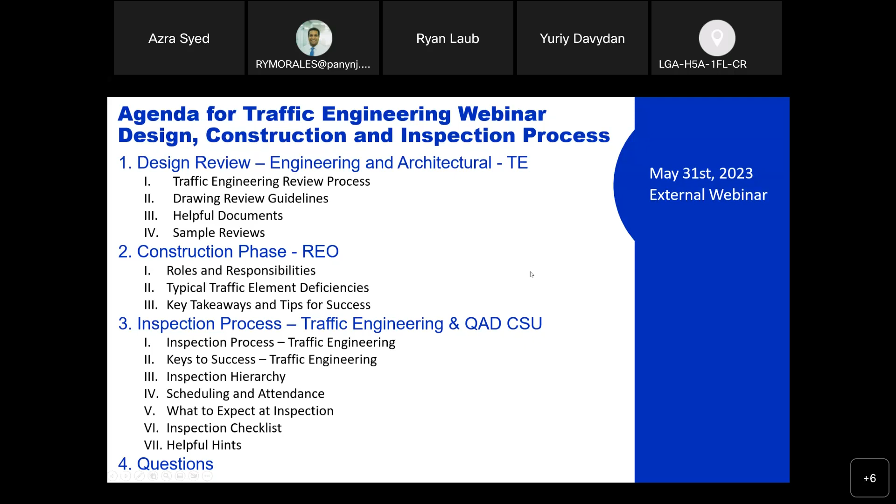Great, thank you. Hi, everyone. I'm Allison Kroenert. I'm the traffic engineer in the Planning and Project Delivery Group at the Port Authority, which falls under traffic engineering. My roles and responsibilities really span across all the Port Authority's different facilities, including aviation, tunnels, bridges, terminals, ports, everything that the Port Authority has to offer. These responsibilities include providing traffic engineering services, which also includes coordinating with TCAP and reviewing the TAAs that you may be submitting.

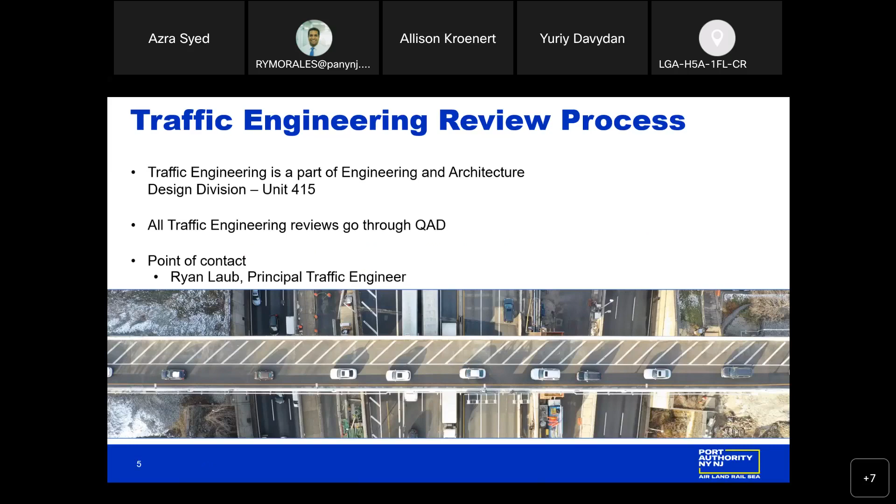Next slide. So I don't do all the reviews by myself. We have a whole team of traffic engineers who are working on these reviews, and we're all part of the Engineering and Architecture Design Division. Now, QAD, our Quality Assurance Division, is actually who ends up coordinating the review. They'll send it over to Ryan Laub, the principal of the Traffic Engineering, Planning, and Project Delivery Group, and then we make sure that it gets reviewed on time with valuable feedback.

Next slide. So you may be wondering, when does traffic engineering have to be involved in these reviews? Now, this list here isn't exhaustive, but it does give a good idea of when to call someone in from traffic for concurrence. So this is any time that a project might add volumes to our roadways or facilities, and this would then result in a scoping meeting required for traffic studies.

Anything that adds or modifies an access point, if you're adding a building that requires a new driveway, that's definitely something that we have to review because we have certain standards that we need to make sure we're adhering to. Anything that impacts our roadways, so this could be traffic signals, permanent traffic barriers, any additional signing or pavement marking on our roadways.

Anytime that you have a project that might impact pedestrian movements, this isn't always thought of when you think of traffic engineering. You mainly think of vehicles probably, but we also get involved in the pedestrian detours as well. And any projects that impact facility operations. So this is a very general bullet point here, but it does encompass a lot as far as facility operations go, which we'll get into a little bit later on as well. And then lastly, projects that require maintenance of traffic on our roadways or pedestrian routes.

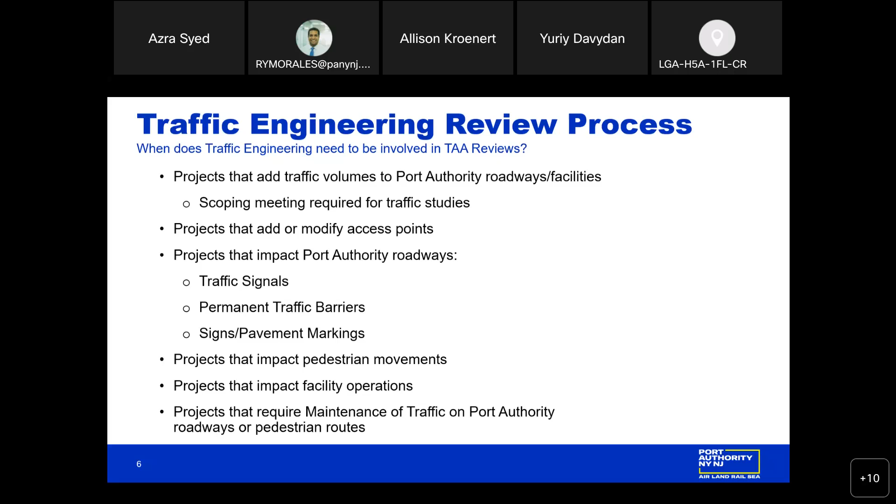So now that you know when to call in traffic, what actually needs to be reviewed?

We have our traffic impact studies, as we mentioned. This would include any design exceptions from Port Authority standards. Design exceptions are if you are deviating from our standards. We usually have different guidelines of what's required as a minimum, what's desired. If we can't meet the desired, that would require a design exception.

So that is where you would work with traffic engineering. We could set up a meeting, write up a memo together, and then I would review that with my chief to make sure we have his concurrence on it, and then we file it away. This is a good way to have record keeping of why we weren't able to meet a certain standard.

Then we have traffic drawings. These are the traffic signals, permanent traffic barriers, signs, and pavement markings. Again, we have standards for all of these. We want to make sure that any of the drawings we're reviewing are following our guidelines here, especially if they're on Port Authority property.

And then lastly, we have our maintenance of traffic drawings. These we want to make sure are following Chapter 6 of the MUTCD, and it's important that we get this during the design phase. When we're going through the drawings, sometimes maintenance of traffic is omitted and it's assumed that it's going to come later, when the contractor is actually planning out the work. But that adds time because we do have our reviews that we need to go through, to make sure that the maintenance of traffic being provided is not only safe, but that it works with our facilities operations. We need to make sure all of that is perfectly aligned.

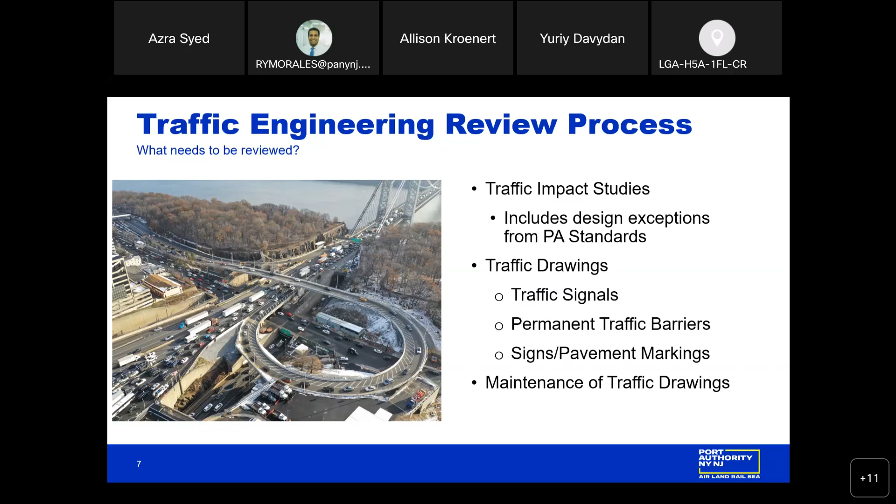So these are some of our codes and design standards, going back to what I was just talking about as far as our roadway access management guidelines. This is where, if you were adding a new driveway, this would be a great reference document. In there we have our minimum driveway requirements, spacing, as well as our desired. And again, desired is the standard to meet. But if you can't meet that standard and it can only be the minimum, we have to justify that in a design exception and we'll work through it.

Then we have our traffic engineering design guidelines, which we'll get into a little bit later on. This document has all of our different standards throughout it - pavement marking guidelines, signing guidelines, anything you might need a reference for, you can find in that document in the appendix. Then we have the FHWA Manual on Uniform Traffic Control Devices.

This is the MUTCD. Here, you'll have everything you need for a lot of different applications. The one that we mainly comment on for TAAs is making sure our maintenance of traffic drawings are adhering to the federal standards and guidelines.

Then we have AASHTO, Policy on Geometric Design of Highways and Streets, known as the Green Book. As we're going through all these reviews and referencing our codes and design standards, once we come to a conclusion and a final disposition, we'll let you know that we don't have any further comments.

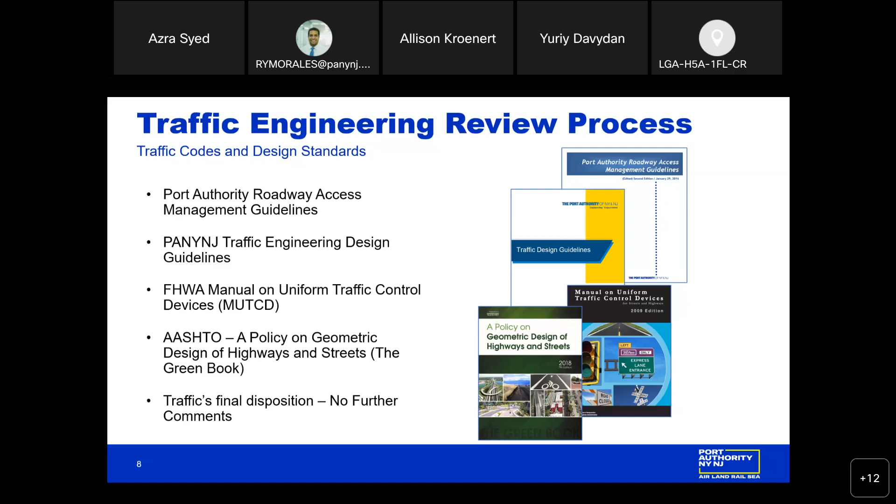So to give you an idea of what we look for internally, we have a quality control design checklist that we look at anytime we audit drawings in-house from a consultant. While this isn't the same exact application, we do look at a lot of similar things here. There are a couple things on this checklist I wanted to point out and highlight.

The first thing here is verify compliance with Port Authority standards and design guidelines. There's a lot of confusion with TAAs, I think, about when you need to follow Port Authority standards versus not. An example I like to use is a parking lot. If you want to stripe out a parking lot with purple pavement markings, but our standard says you have to use white, you are able to use those purple pavement markings if it's your parking lot. But that being said, you still have to meet the ADA requirements and make sure the building has proper ADA accessibility. So while there's a bit of a gray area sometimes, where you need to meet federal codes versus Port Authority codes, we'll be able to help guide that as well.

The next thing here is verify that the conformation design is in compliance with all code standards identified on the drawings, including federal, state, local, and others. This is exactly what I was just mentioning, that if you have a parking lot, you still need to meet those ADA requirements. That's not something we can just bypass, even though it's a private parking lot. We want to make sure everything is in compliance. Then just make sure your design calculations are provided and signed, if and when they're required.

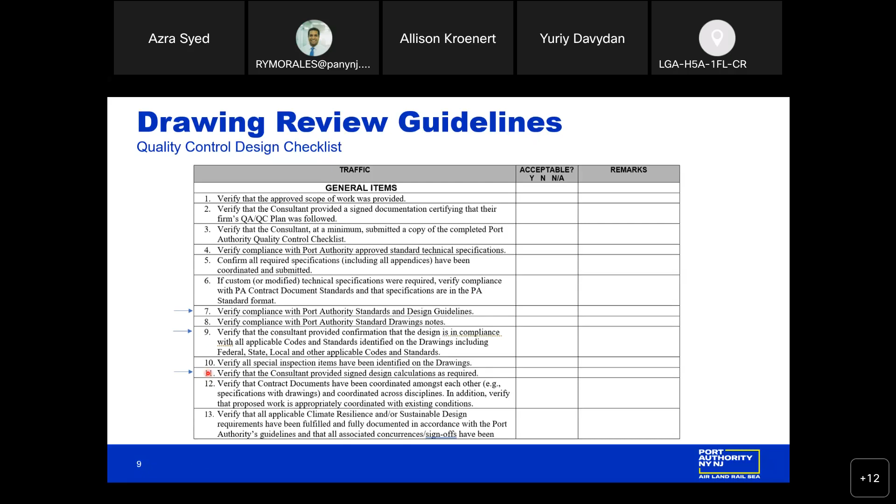So the one that Ryan is pointing to here: verify that a construction staging and phasing plan has been provided on the drawings and has been coordinated with the hours of work and construction duration as required. This really ties into our maintenance of traffic plans. We want to make sure that the MOT we receive is in compliance with the MUTCD, but also that it works for the actual project you're looking to implement. We want to make sure the construction staging and phasing matches what we have in the MOT, that everything is covered, and that it's been coordinated with the facility for hours of work—construction durations are a big thing—and also coordination with other projects at the facility.

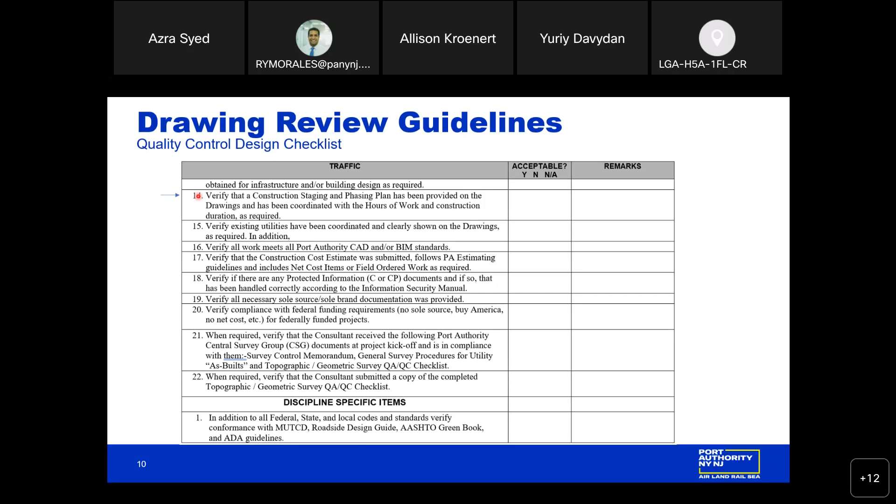We can go to the next slide.

So here we have a lot of maintenance of traffic specifications. Verify that the MOT drawings have been included and coordinated with construction, staging, and phasing, which we just mentioned.

Verify that the contract documents specify the extent of flagger operations. So if you have a road that's being closed off in one direction and we're using flaggers for both directions, we need to specify the extent of the flagger operations on the drawings. I wouldn't include flaggers on your drawings if you don't actually need them, and I would take out any notes of flagger operations if there are none involved, because there is sometimes confusion with the contractors. That being said, flaggers are a specific job construction—the CMD portion we'll get into in a bit—but flagger operations aren't something just anyone can do. So it's important to note that as well.

Verify that the documents specify the extent of daily and end-of-contract removal of these devices. You can't just leave maintenance of traffic out throughout the night—everything should be picked up at the end of the day to ensure our facility operations are running. So this ties into our hours of work.

We want to make sure that any of our existing traffic control devices—signs and markings—have been checked for any deficiencies or missing items, just to confirm everything is the way it was placed out there. If there's any damage to Port Authority guide rail, it should be replaced in kind, with a note specifying that it will be replaced at no cost to the Port Authority.

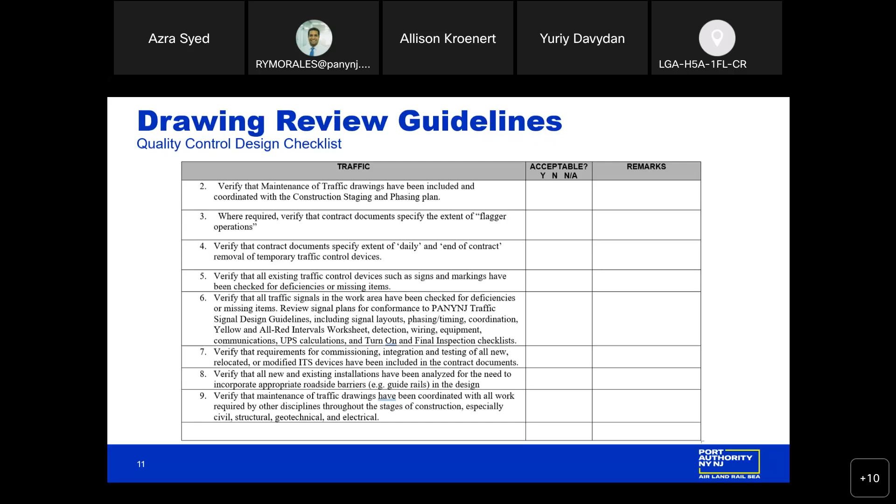Next slide. So these are our traffic design guidelines. This is a super helpful document. It gives the overview of our traffic discipline, the breakdown of our different groups and the different roles and functions of each group within traffic engineering. Then it goes through our technical and code standards and our regulations, then into our design criteria, and also has all of our standard notes, details, and specifications.

As I mentioned, this has all of our standard notes, details, and specifications, but this is just typed out. If you need any CAD files, we're always available and willing to share those as well. So if you need specific details for pavement markings, signing, whatever it may be, we can provide that to you. Same with our specifications—if you need to know exactly what thermoplastic we're using, we're able to provide that. You can find the code numbers in the document here, but if you need the actual PDFs or CAD files, we can send those out to you.

In the appendix of this document, which you can find online under the engineering documents, you'll find our roadway access management guidelines that I mentioned earlier, airport roadway design manual, low clearance signing guidelines, pavement marking design guidelines, roadside and median barrier design guide, our ITS design guidelines, our signal design guidelines, and also our Division 1 maintenance of traffic specification, which is important anytime you are on or adjacent to our roadways.

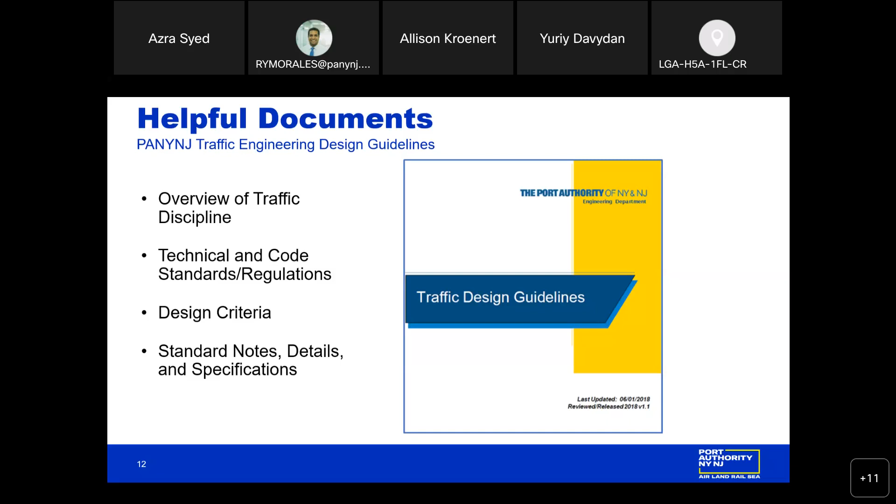You can go to the next slide. So now that we've talked a lot about our review process and what has to be reviewed, let's talk about some sample reviews. Let's pretend that we have some utility work at JFK.

What are some of the comments you're going to be seeing on these drawings? If no drawings are provided, we'll make sure that we receive them—provide and review maintenance of traffic drawings according to Chapter 6 of the MUTCD. We also want to ensure that all the proper permits are obtained by all stakeholders needed: New York City DOT, New York State DOT, Port Authority, depending on the roadway. A lot of our facilities overlap with a lot of other different stakeholders, so we want to make sure they're all notified and aware and that proper permits are obtained.

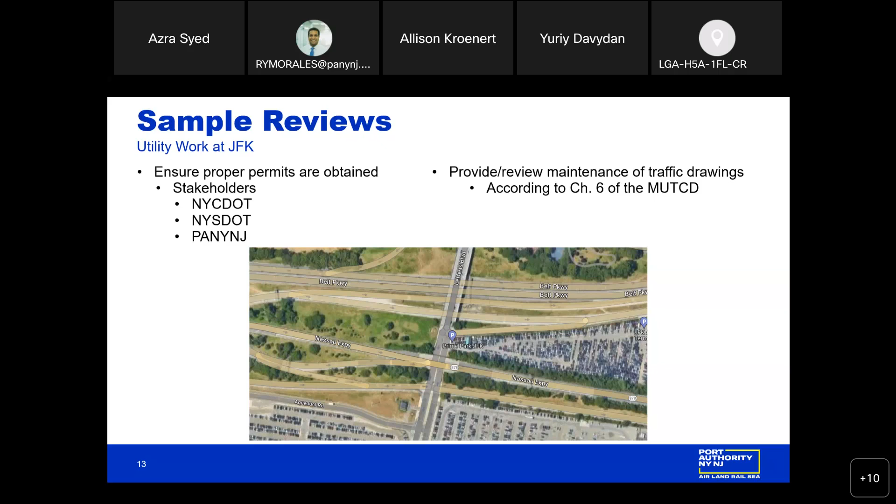Can you go to the next slide? So here is another example. If we have a new park at the George Washington Bridge—you can see it on the screen, there's the George Washington Bridge Park. This was something we had actually done in-house.

If a new drainage pipe has to be installed and we have to do maintenance of traffic in the roadway that's cutting into the sidewalk, we want to make sure we're still maintaining access for pedestrians, having that proper MUTCD maintenance of traffic on Cabrini Boulevard, whatever it may be. And as mentioned before, we want to make sure any other construction occurring simultaneously is well coordinated with the engineer. On this drawing you can also see the blue call-out for the North Walk, which was going on simultaneously with the Bridge Park, so we want to make sure that's all coordinated.

And then, of course, because this is near New York City DOT roadways, if we have to do any coordination with them for closures on their roadways, their sidewalks, whatever it may be, we want to make sure that's covered.

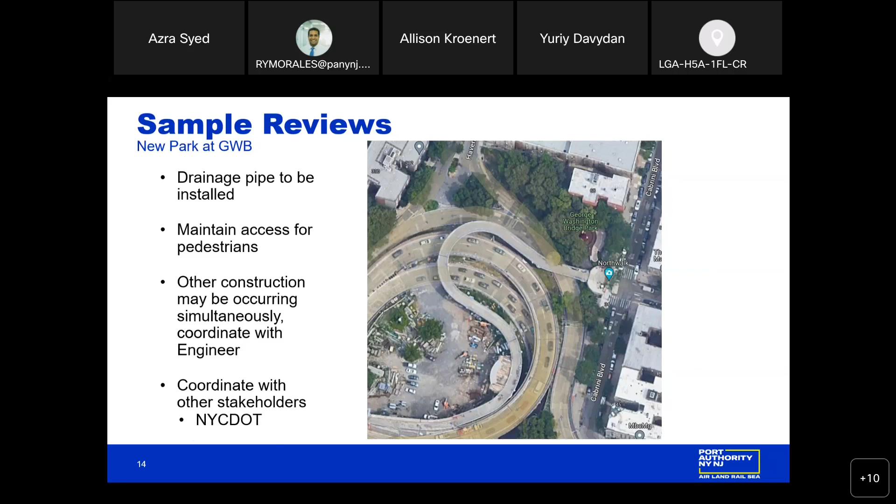If we have a new driveway installation, we want to make sure that any additional driveway access follows our access management guidelines. As I mentioned, there's the minimum, there's the desired. We try as hard as we can to meet that desired, whatever the configuration might need to be. So we want to make sure that's followed.

Depending on your traffic impact analysis of how many vehicles will be using this driveway, we might need to look into whether or not it requires a traffic signal. If it does end up requiring a new traffic signal, we need to make sure we're following the traffic signal design guidelines and pavement marking guidelines. In most cases, the traffic signal will be turned over to the Port Authority at the end, so we'll have to go through the whole inspection process, which we'll get to in a little bit.

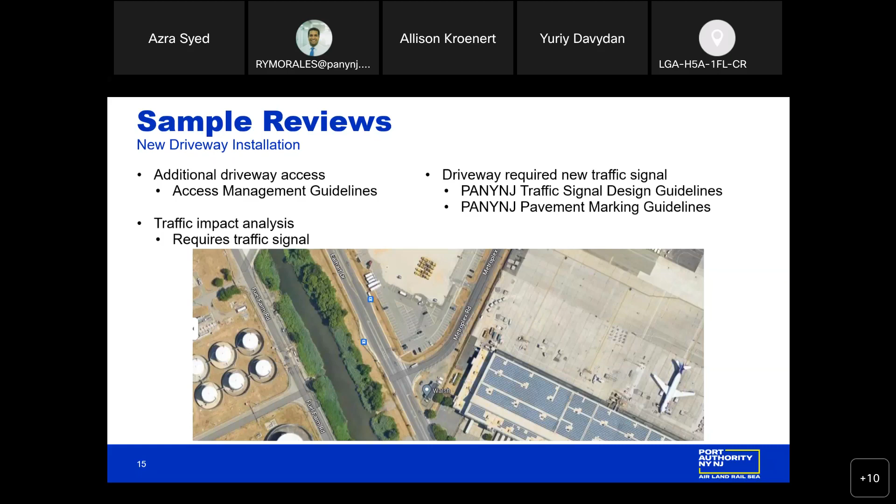This is something we've been seeing come up a little bit more recently as well—EV charger installations. Typically they're within a parking lot that already exists. If that's the case, we need to make sure that maintenance of traffic drawings are provided in accordance with Chapter 6 of the MUTCD. We need to make sure that ADA requirements are also met. Even if it's your own lot, ADA requirements do have to be met.

If you're only installing a handful of chargers, depending on the location, I know there have been examples in the past where only one, two, or three chargers are being installed. In that case, signs have been implemented that say something along the lines of 'accessible EV charging space, use last.' This ensures that we're meeting ADA compliance, also making sure you have the hatched out space on the side that's required. All that can be found in our guidelines as well.

That being said, if it's being turned over to the Port Authority, make sure our signing and striping matches our standards here. The Port Authority has specific EV charging standards.

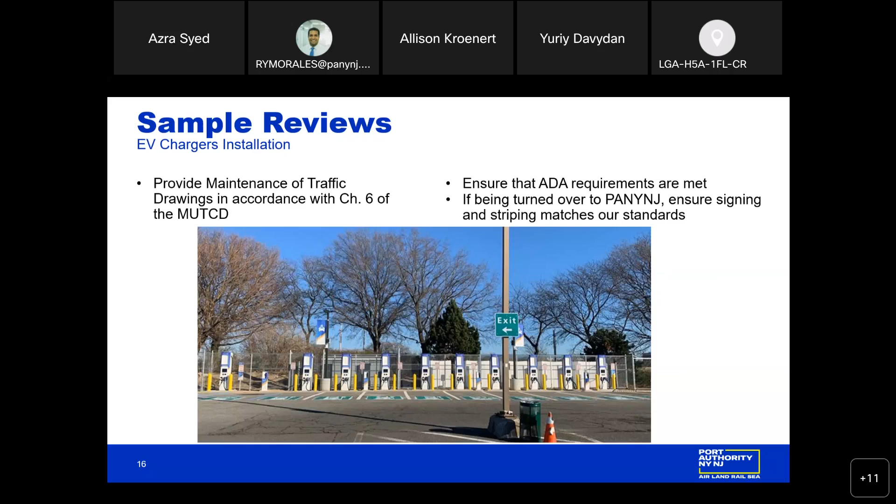I know traveling is confusing for a lot of people and just navigating the airports can be difficult. What might seem obvious for some people going around and navigating a site, it's not always that straightforward. So we want to make sure all of our customers are also having a good experience.

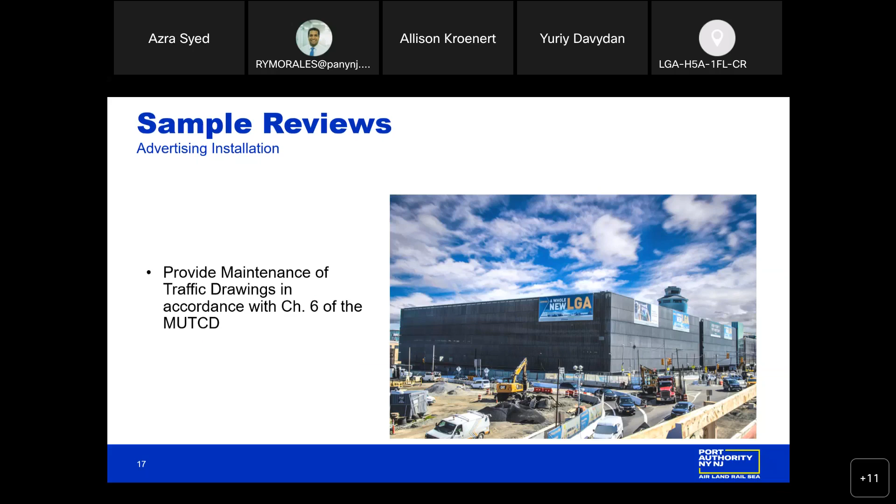Thank you very much, Allison. And with this, we want to open it up for the resident engineer's office. There is a question, Allison, for you, but we're going to read that at the end. So stay with us. Sounds good.

Thank you, Ryan. For those of you who have participated in past webinars, our presentation may look a little familiar to you. Just for the record, we've standardized our presentation to include roles and responsibilities by the various stakeholders—specifically the engineer of record, the general contractor, as well as the resident engineer's office—and how we coordinate the work throughout the process. This can all be found in the tenant construction review manual. It's outlined, it's clear. We update these slides to incorporate new disciplines, new elements of work.

As you know, the resident engineer's office is located at various Port Authority facilities. We are the boots on the ground. We do go out and field audit in accordance with the approved drawings. As Allison clearly outlined the requirements for the design stage as well as during construction, I have with me Dan from my office as well as Michael, who will touch base on the REO roles, construction process, and typical deficiencies found. We are here to assist you throughout the process and get you to that final permit to go live or occupy the space. So I'm now passing this on to Dan to start off the presentation.

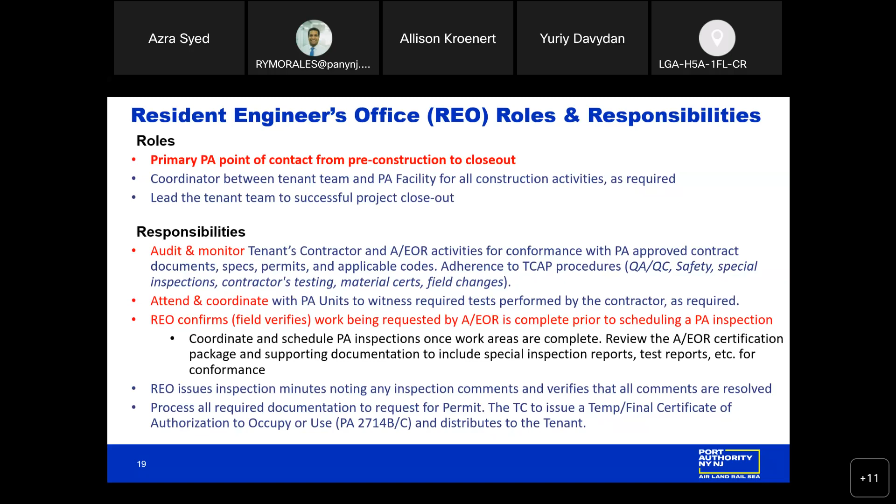Starting with the design phase of the project, it's very critical that at the start of the design phase, the tenant and the A/EOR conduct a site visit prior to submitting any contract documents. The purpose is to identify any existing conditions within or surrounding the site, such as obstructions or anything that could lead to a field or scope change later on, which could affect the overall project schedule.

So we want to minimize any changes that can occur in the field, and this is all through the A/EOR and tenant site visit. The REO actually reviews the contract documents for constructability and to get an understanding of the scope of work.

In terms of traffic, we look at the MOT, or maintenance of traffic, drawings to understand any operational impacts. If there's any proposed phasing of traffic, we want to understand that via the phasing plan. We want to identify what is temporary versus permanent, and we ensure that details are provided for any proposed MOT elements, such as cones, drums, barrels, and channelizing devices. We want to know the size and spacing of these devices. These are all items we look for in the drawings.

In terms of traffic equipment, we look for quantity and sizing for the equipment, foundation type, and if there are any signs to be mounted onto poles.

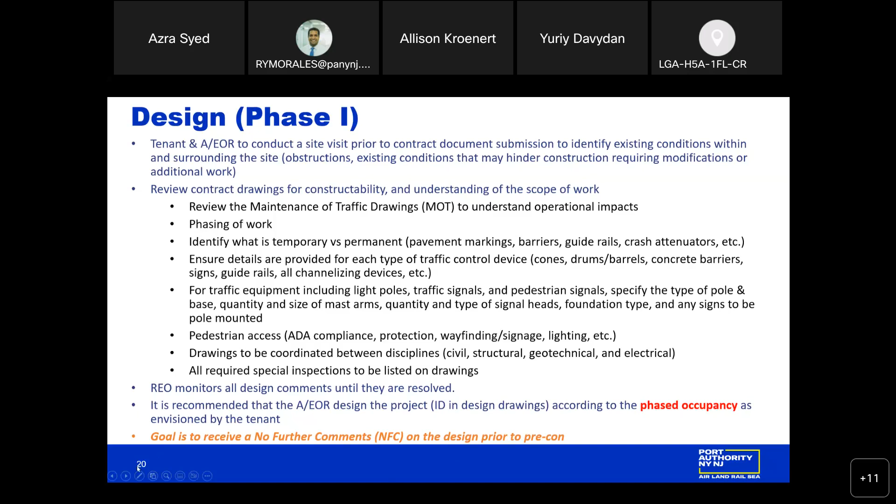A pre-construction meeting can be scheduled once all pre-con documents are approved and the design reaches at a minimum conditional approval, though full approval is the goal. The REO can begin collecting and reviewing pre-con documents as soon as a contractor is identified.

During the pre-construction meeting, we discuss design, go over any open design comments and a path to NFC, and if there's a change of EOR, what that process would be.

We'll review the work scope and the contractor's schedule. We want to see that the schedule is detailed and includes any anticipated or required inspections, testing, milestones, opening dates, and any phased openings. These are all critical elements that we look to see are included in the schedule, and the more detailed, the better.

Any operational requirements or maintenance of traffic, if there's any traffic shifts or phased opening of any roadways, we will also review the site safety and any applicable permits for the scope of work. If the scope of work is outside of Port Authority property, we'll review the limits of work to identify the authority having jurisdiction, and if necessary, we'll come up with a delineation plan to identify who the AHJ would be for that scope of work. We'll review the roadway phasing plans, the contractor's QA/QC plan, and the inspection process to successfully achieve closeout.

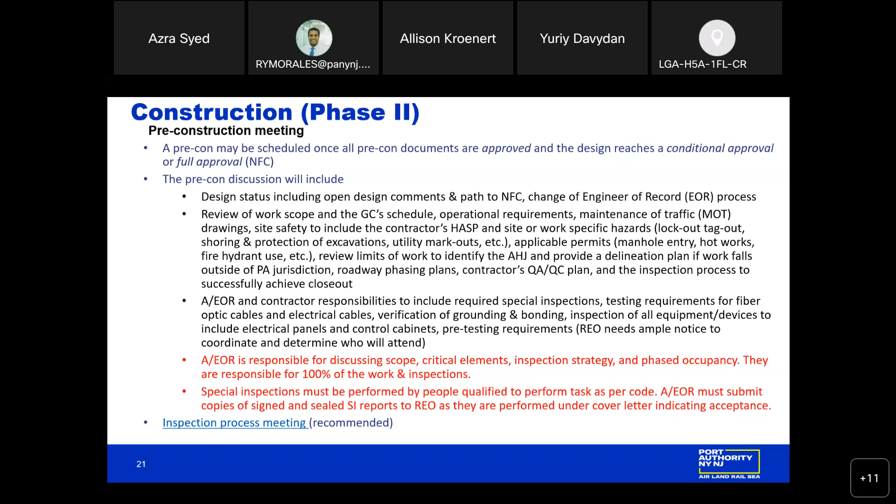Thank you, we can go on to the next slide. Moving on to the construction phase. During construction, the A/EOR is expected to ensure that all elements of work are complete prior to scheduling or requesting an inspection.

The REO's role is to monitor and audit all field work, including attending or witnessing any third-party special inspections. This is why it's critical for the contractor to provide a detailed schedule and give the REO a weekly two-week look-ahead, so we're aware and able to attend these third-party special inspections. The contractor should provide the REO advance notice of any pre-test or special inspections.

All materials used on site are to match the PA-approved contract drawings, and the same applies to the traffic and roadway layout. The REO will coordinate with the appropriate PA groups, whether that's the PA electrical unit, to coordinate any manhole entries, electrical shutdowns, or tie-ins. The REO will ensure all work is complete, installed as per the latest PA-approved drawings, and free of deficiencies prior to scheduling a request for official PA audit inspection.

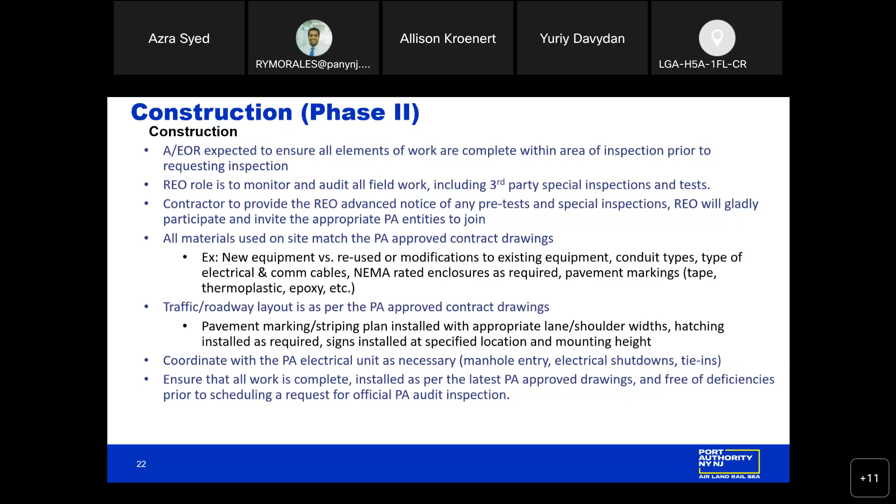We can go on to the next slide. I'm going to hand it off to Michael, who's going to go over the typical findings of the REO during these PA audit inspections and the typical deficiencies that we find.

Good afternoon everyone, my name is Michael. I'm with the REO here at LaGuardia. As Dan mentioned, I'm just going to quickly jump through a couple of these bullet points of typical deficiencies that we see in the field when the work is being performed, and also touch on some tips and suggestions on how we can avoid some of these issues.

A very common one, probably the most common one, is that the contractor did not install the work as per the approved MOT or approved TA drawing. For most of the work, we're either going to have plans in the MOT plans or the TA themselves, or we'll get subsequent RFIs and phasing plans which get vetted through the applicable process. So when all these plans get vetted, the expectation is that when the work is installed in the field, it's going to conform to what's been depicted on the plans.

Now, several times for various reasons, that's not the case. So we see situations where the contractor takes it upon themselves to make field changes without any input from the EOR or Port Authority, for various reasons that may arise in the field.

MOT plans are developed without consideration of real, site-specific field interferences and obstructions. There's fabrication errors for signage, and incorrect or deficient traffic control devices being used that

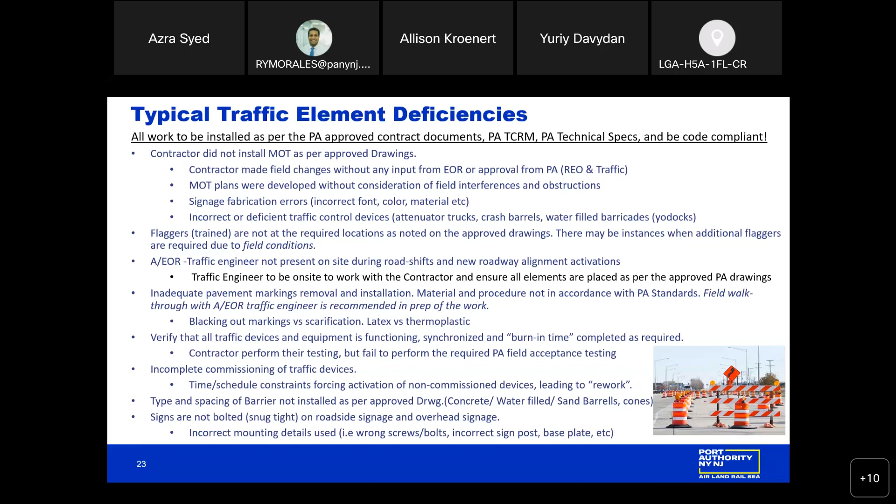All right, so just continue with some more deficiencies. Location of traffic poles. The plans show the traffic poles, posts, signposts, whatever it may be, at certain locations. And in the field, the contractor elects to put it in the middle of an ADA right of way. That's an issue.

Deficient pedestrian sidewalk and walkway. So we talk about traffic, we're also talking about pedestrian traffic. We have to maintain ADA requirements for all our walkways that we install for any kind of temporary or permanent configurations, which would be going through the TCAP review process, as Carmela and others have said.

Incorrect and improper modeling of traffic volume. As part of some of our requirements during the review process, we may require a model for a new roadway configuration to be submitted by the engineer. If they're not taking into consideration the correct volumes, the correct flow patterns, the correct traffic control devices, signals, everything, that may present an incorrect depiction of the actual flow of the new volume, which when implemented is going to cause issues.

So just to touch on 101, for specific traffic devices such as signals, ITS, focusing on signals, we have our pre-checklist, pre-activation inspections that have to be performed by PA traffic. Sometimes that may be overlooked, and then we have issues with the operation not being in conformance. Again, not a conclusive list of all the deficiencies, but just some typical ones that we run into in the field in practice.

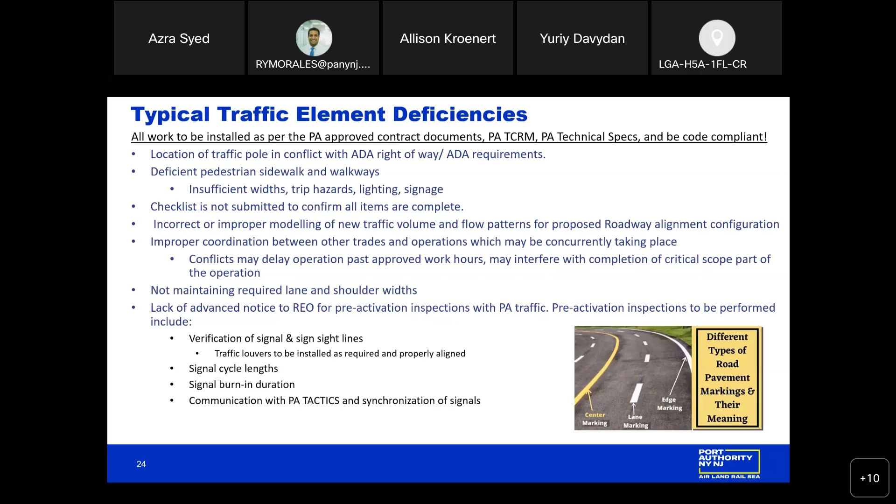Thank you, Michael. So going into field conditions and scope changes - we should capture any field conditions during the design phase site visit, but if something comes up during construction, the A/EOR must notify the REO, and the field inspector will bring it up to the attention of the resident engineer, who will determine the best path to capture the conditions, whether that's through an official scope change submission or captured in an as-built drawing.

Typically for fire life safety code related issues, the AEOR must submit an official scope change for PA QAD design standards review or PA traffic review. For minor field conditions, the revisions can be captured on as-built drawings with the resident engineer's concurrence.

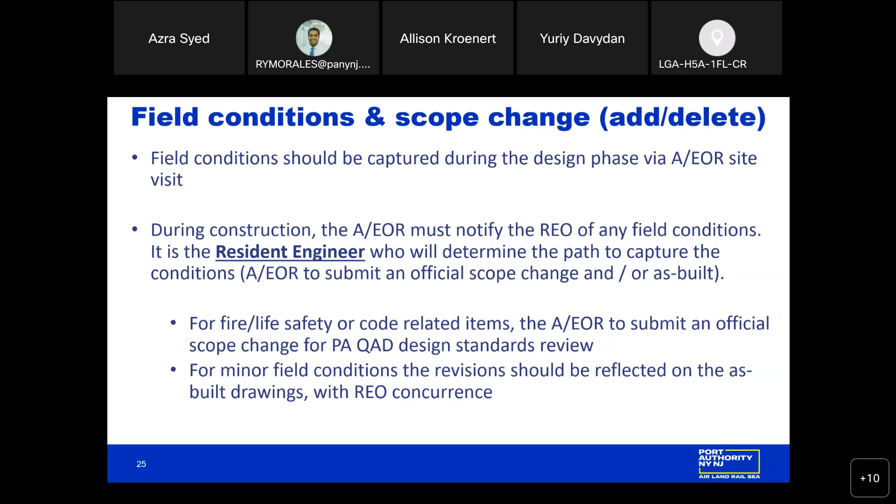Going into AEOR certification requests for partial or final inspections, or phase 3, Port Authority inspections are scheduled by the resident engineer's office through receipt of A/EOR signed and sealed certification requests. Certification requests must be reviewed and approved by REO prior to scheduling any inspections. No inspections will be conducted on scopes of work with open design comments or any installations deviating from the latest PA-approved drawings. An A/EOR representative who is knowledgeable of the scope of work and contractor personnel must be present to conduct the required inspection.

This includes any appropriate subcontractors that are required to operate, test, or demonstrate any systems. The contractor should be able to provide any equipment, tools, or ladders that are required to access an area for inspection or demonstrate any required testing. At the conclusion of each inspection, REO will issue inspection minutes, noting all inspection comments.

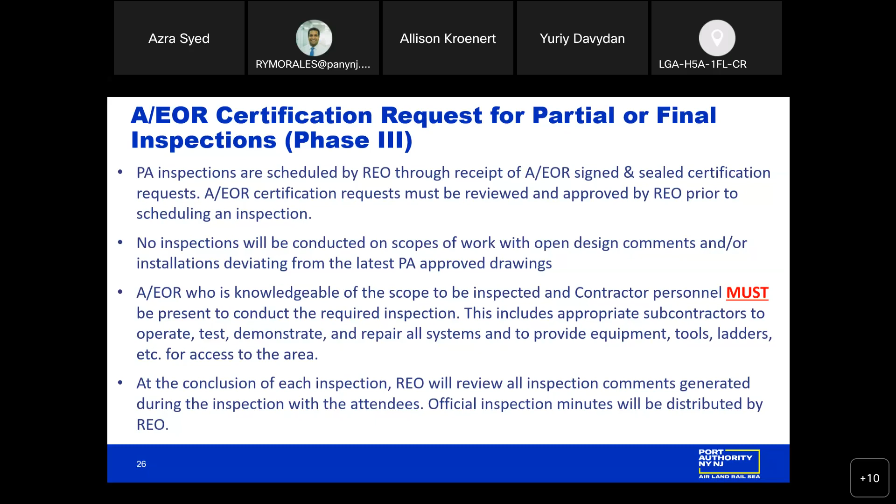Next slide, please. I just want to emphasize the importance of bringing the right engineers to the inspection, whether it's your traffic engineer, someone that's knowledgeable of the work zones. As these inspections take place, our quality assurance division inspector may have some questions, as you'll hear in the next segment of this presentation, and having the right individual, right engineer on site could help reduce those comments if they find them acceptable in response.

So it's very important to have all the necessary documents, whether it's shop drawings, special inspection reports, submittals that have been approved, to help depict the situation or area of concern, and hopefully that response gets accepted, so we end up, instead of a page long of comments, we maybe have 1 or 2. That's the goal - bringing the right people, always having the engineer of record on site as frequently as possible as the work progresses, so that we could achieve the goals of successful inspections and activations of roadways.

Please continue. Thank you. So we're just going to go over what's required in a certification request package, whether it's a partial or final inspection. An A/EOR cover letter is always required. A Ph 2 12 form is required for a partial inspection. A Ph 3 14 is required for a final inspection request. A sketch showing the area being certified.

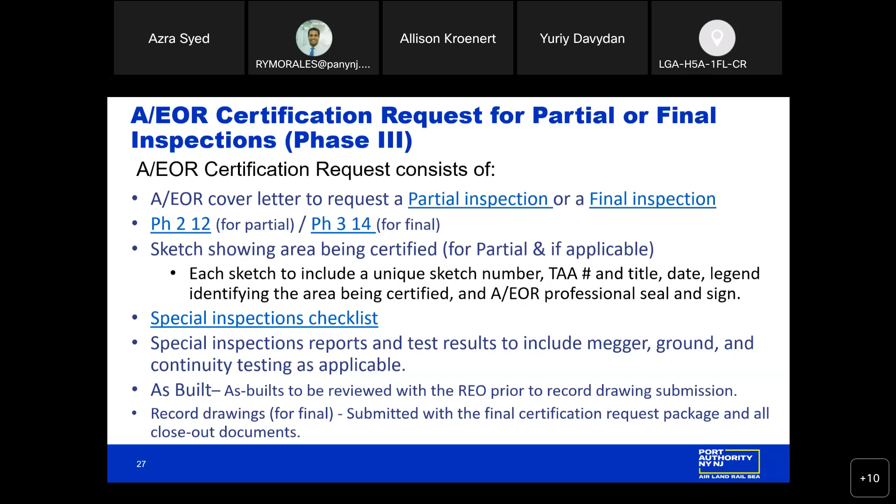We're going to outline the differences between a partial and a final inspection. A final inspection is used only when all work on the entire TAA is complete and full design approval is achieved. A partial inspection is used when all work within a specific area is complete, and again sketches may be used to identify the scope of work being certified. A partial inspection can be for occupancy or not for occupancy. A partial inspection not for occupancy is used when requesting an inspection for an area prior to closing access.

This could be prior to closing up an excavation where something might need to be inspected. A partial inspection for occupancy is used when beneficial use is requested per the approved design phasing plan, so if you're looking to activate a portion of roadway.

And required documents at the PA inspection - having an A/EOR on site who's knowledgeable of the scope of work and able to answer any questions and provide documents, whether that's the latest approved contract drawings, any RFI submittals, shop drawings, special inspection and test reports. This is critical to the success of any inspection, ensuring the A/EOR representative can answer questions on the spot, which helps minimize any inspection comments left at the end of an inspection.

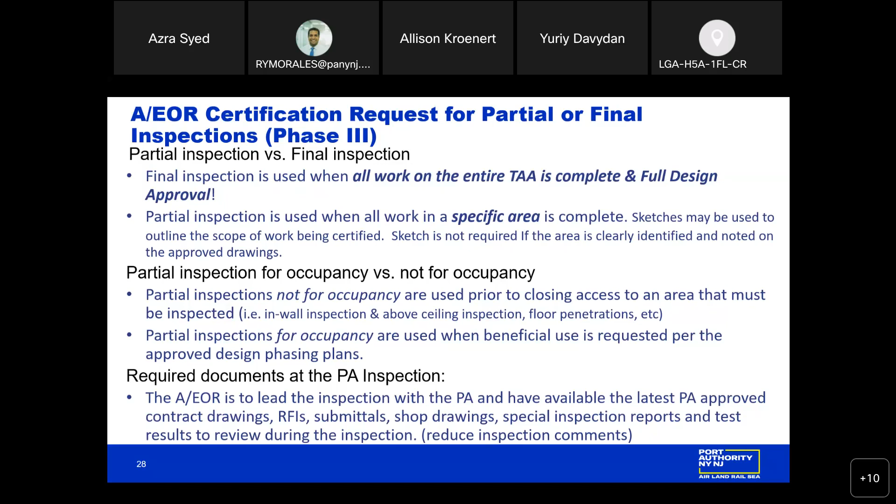And we can go to the next and last slide for the REO. I'm going to pass it back to you just to go over the key takeaways and tips for success. Okay, so just quickly going over these last bullet points here.

The first one here, we highly recommend full design approval prior to a pre-con meeting to avoid any issues in scheduling PA inspections, because essentially, without full design on any scope of work we're doing an inspection on, we're not going to be able to issue any permits on it. And on the REO level, we really won't even do any inspections on that kind of scope.

Again, if there are open design comments, the resident engineer's office will not accept a certification package from the engineer of record. All areas must have no comments associated with it. Right, and moving on to the next one.

We also recommend the EOR performs on-site walkthroughs as the design is under review, to ensure no glaring work scope is getting missed, and to get familiar with the area.

Like I mentioned in earlier slides, a lot of the issues and deficiencies we see in the field happen because when we get our approved plan and go out for implementation, some elements of the plan just cannot be constructed or installed. So in those cases, essentially the plan has been made up by the EOR under idealized conditions, which in reality in the field doesn't match.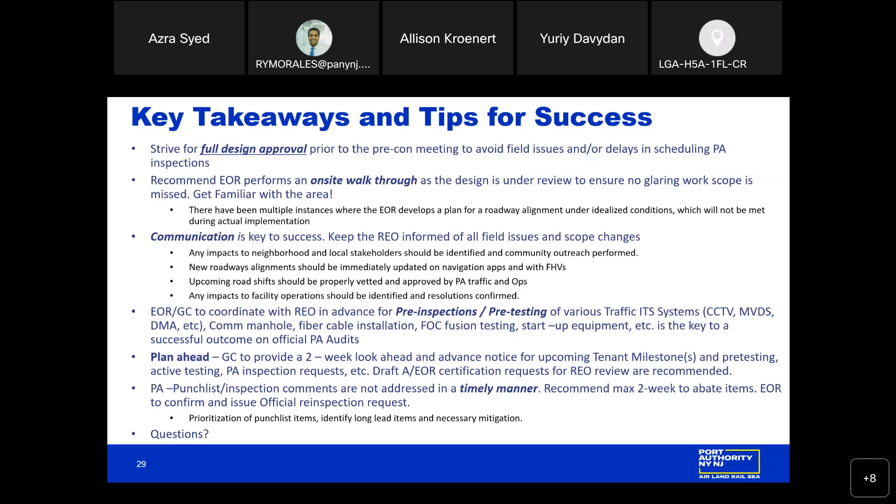So the first thing I wanted to go over is traffic's involvement in construction. Any projects that impact Port Authority roadways may require a pre-construction transportation management plan and/or monitoring by the agency operations center during construction. A transportation management plan might just be the maintenance of traffic drawings, or it might be a little bit more involved—it depends on the context. We have a general agency operations center, and a couple of our facilities have their own agency operations centers as well, so interagency coordination will make sure that happens.

Anytime we install or modify any permanent traffic devices on our roadways, that requires final inspection—traffic signs, pavement markings, permanent traffic barrier. We want to make sure that what's in the contract drawings and has been approved is properly implemented, as everybody was just talking about in the previous slides with construction. We want to make sure everything on the drawings is what ends up being in the field, because that is what's been approved.

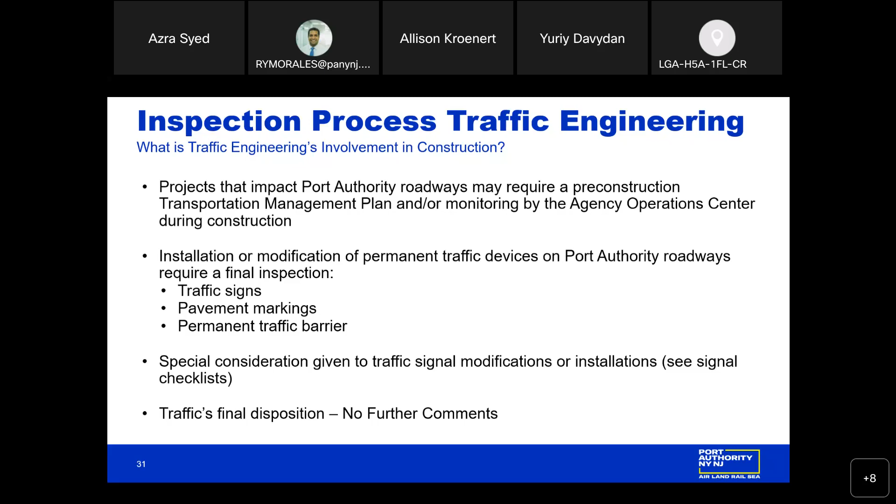There's special consideration given to traffic signal modifications or installations, and we'll get to that on the next slide. Again, our final disposition with design and construction will be no further comments.

So here we have our traffic signal inspection checklist. You can also find this on the Port Authority website. It is a pre-final turn-on checklist and then the final traffic signal checklist. This has to be completed to the satisfaction of the authority before a traffic signal activation can be authorized. We make sure all the proper people are out in the field making sure this inspection is valid.

There's about 100 items that can be checked, under 8 different categories: prerequisites, pole and mast arms, signal heads, push buttons, cabinet, signal operations, detection, pull boxes, and the markings and signs related to the signals. It's a very extensive checklist. There's the pre-final checklist, which is when the inspection begins, and then 30 days later we have the final checklist. So it's a longer process for traffic signals as opposed to just verifying a sign location, but we want to make sure the traffic signal is fully operating the way it should be.

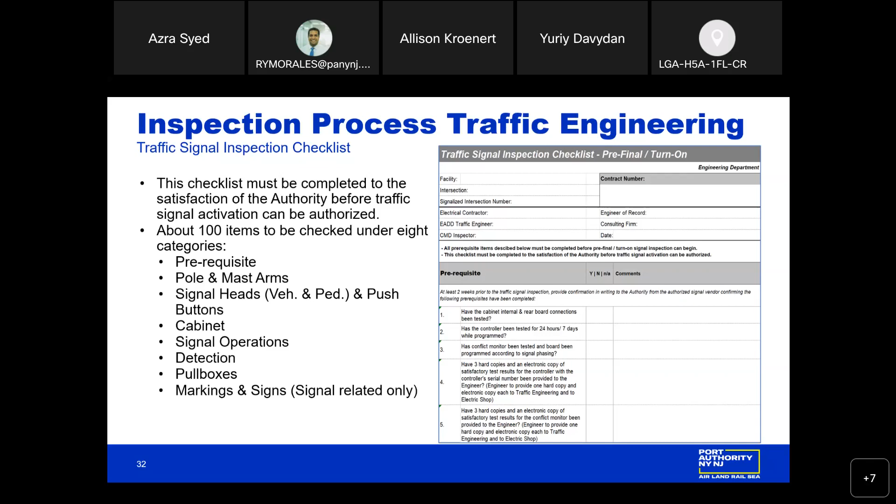Next, base maps. In order to make sure our traffic drawings are accurate, we want to make sure we get updated base maps at the completion of a project. So if you're adding a new driveway, we want to make sure we know exactly where it's located and that we have the proper CAD files to make sure it matches and that we integrate it into our overall base map of a facility.

Upon completion of a project, make sure any CAD files that show changes to the roadway network—whether it's a driveway, an access point, or even restriping of a roadway—are captured. We want to make sure we have those changes readily accessible for the next time somebody has a TAA in a similar area, or next time Port Authority has a project in the same area, so that we have the accurate files.

These changes will be incorporated into future base maps of the facility, and that's part of our final inspection checklist—once pavement markings are installed, we have the proper CAD files and can integrate them into our base maps. Once the driveway is installed and completed, we can integrate that too, because even though it may seem small, like restriping a roadway or adding a left turn bay, it does impact our drawings and future projects.

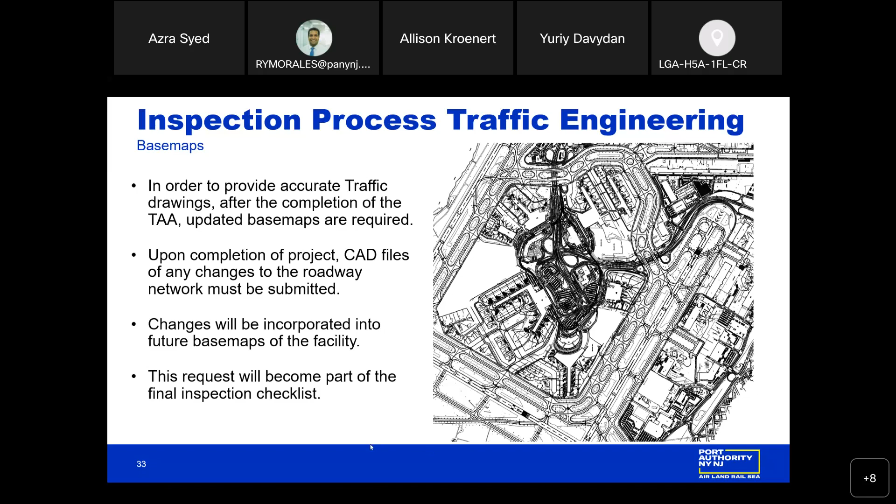Our keys to success within traffic engineering and the TAA process is really early involvement. Any pre-scoping meetings allow us to discuss a lot of the projects, so we can agree on new driveway locations, talk about the need for signalization, any studies or traffic analyses that might need to be done, and any construction staging we can provide input on. We're all here to help—we're all working toward the same thing.

We can also make sure we're adhering to Port Authority standards where we might need possible future design exceptions, and discuss where you might not need to follow certain Port Authority standards. Our main role prior to the review is to explain the operational impacts the project may have on the facility. When we have these discussions about the intention of the project, why we're doing something the way we are, we're able to explain the impact it might have on the facility, whether positively or adversely.

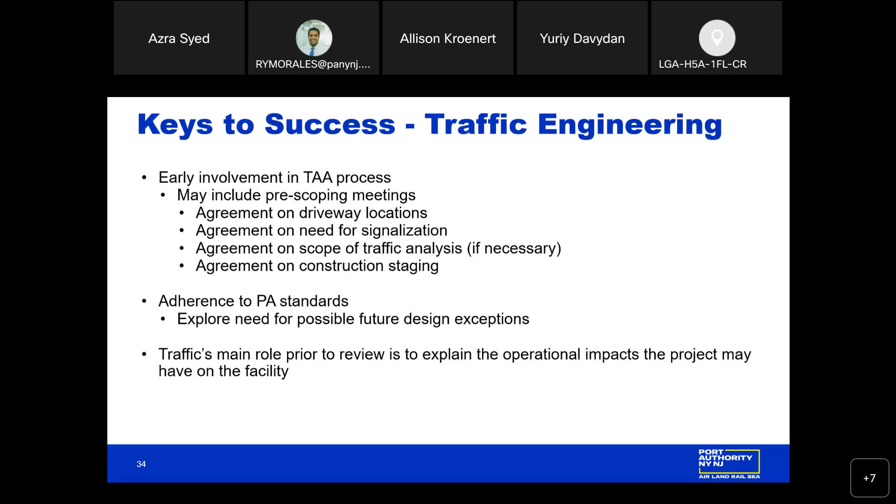As we mentioned earlier, the engineer of record is 100% responsible for all the work and the inspection. We can't emphasize enough that the engineer should be on site as often as needed to ensure the work is being installed as required. The resident engineer's office only performs audits.

We're out in the field verifying that the work is being installed as per the approved drawings, auditing the work taking place by the general contractor. The QAD, our Quality Assurance Division, which is Jamal's group, attends inspections that the resident engineer's office schedules officially once we receive the engineer of record's certification requesting a partial or final inspection, or if there's coordination work that the REO understands, based on the two-week look-ahead schedule, involves live testing or field verification, we'll invite our Quality Assurance Division partners along. Similarly, with traffic engineering, if there's any pre-testing required, we'll coordinate with them as well.

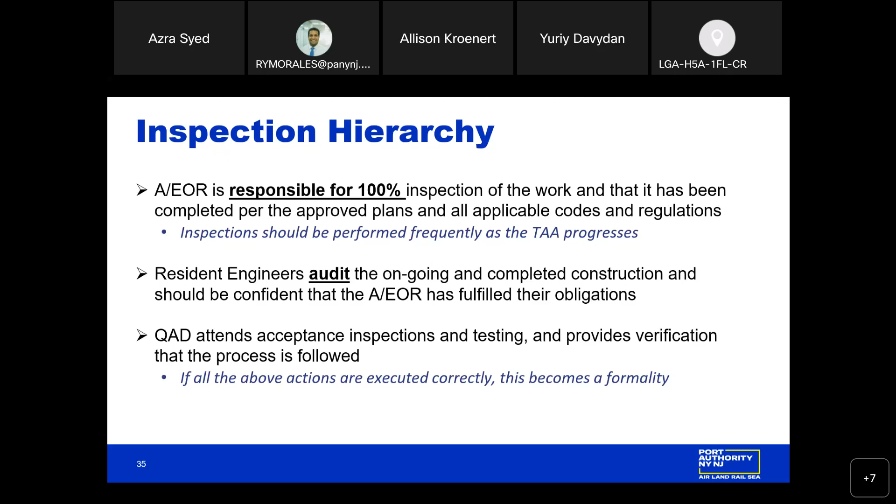The tenant coordinator is part of the TCAP stakeholder team. They work with the tenants and their team on resolution of rider comments, from the onset of the design submission through full design approval, and at pre-con meetings, sometimes called kickoff meetings. They assist and remind the tenant and their engineer of record to get those rider comments resolved, to ensure compliance, and to avoid delays during the construction phase, protecting the go-live or grand opening dates the tenant envisions on the schedule.

The resident engineer's office will also work with the tenant on resolution of rider comments. We help the tenant coordinator and team get those comments to, at minimum, a conditional approval before we schedule a pre-construction meeting.

Inspection requests will not be accepted by our office, the resident engineer's office, and our Quality Assurance Division is emphasizing this again. If there are open design comments related to work being called out on a partial or final inspection, we will not honor it. We will not put it on the schedule. It will not be official.

The resident engineer's office is responsible that once we receive a certification package, we go out in the field and verify the work is complete and in compliance. If we see open issues or issues that don't match, we will not schedule any official inspections.

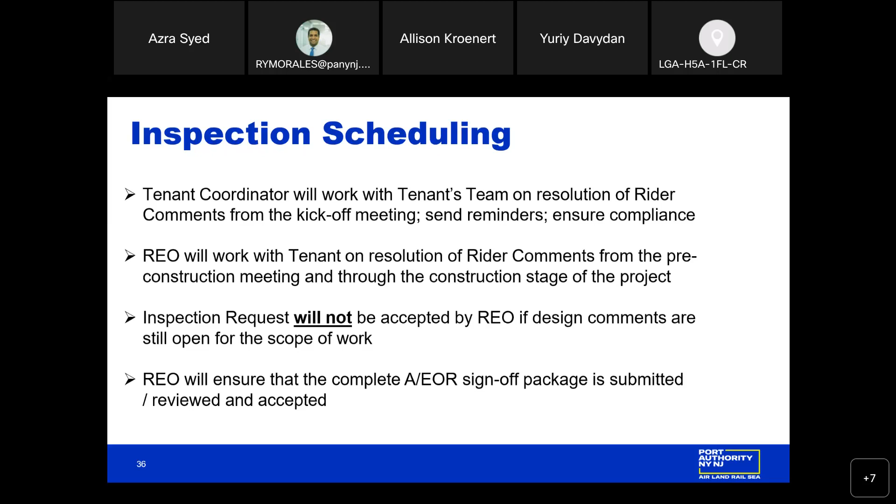What is expected at the inspection? Examination of all traffic elements, physical installation of signs, signals, crash barriers, striping. Allison has that checklist, which is a great way to ensure that before we get a certification package, all these critical elements of work are installed correctly and vetted through the process.

Examination of bolts, the pattern, the size, the numbers, the washers, the torquing. I had seen, many times when we were doing the redevelopment program here in Terminal B, that signs were installed and sometimes bolts were not torqued properly. Once a resident engineer came across these, we withheld scheduling the inspections. So it's important that the engineer of record's team go out, do a site inspection, a pre-inspection, to ensure all these critical elements are in conformance.

Pedestrian crossings, signals, signs, striping, ADA compliance—make sure it's all in conformance. Other areas required by the scope of work also apply; we want to emphasize that the engineer of record is out in the field ensuring the work is in compliance.

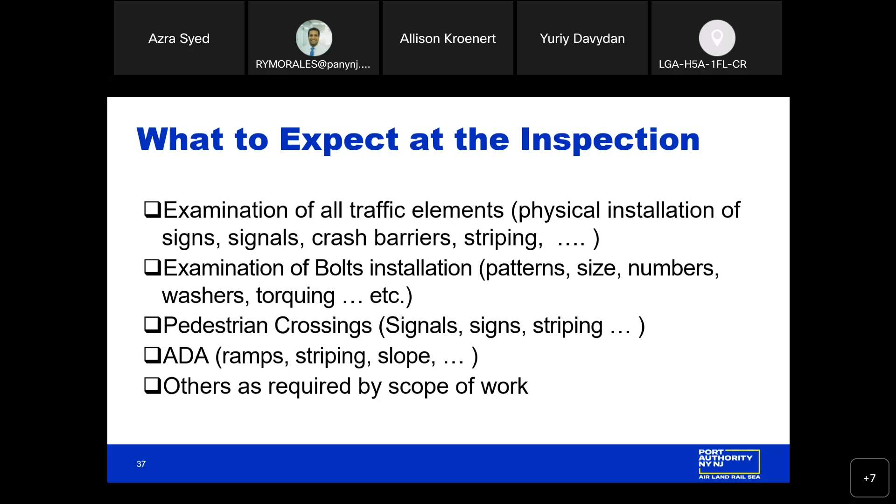Who attends these inspections? We request that the tenant, the engineer of record, or the engineer of record's designee must be in attendance. The resident engineer's office will cancel an inspection if at minimum the engineer of record or representative is not in attendance. The general contractor should be on site, prepared to test.

If you're testing controllers to activate traffic signals, we would make sure you have enough labor forces in the field to carry out that test. They should have all the equipment, tools, ladders, and man lifts needed to provide proper access so the Port Authority can perform these required tests and audit inspections.

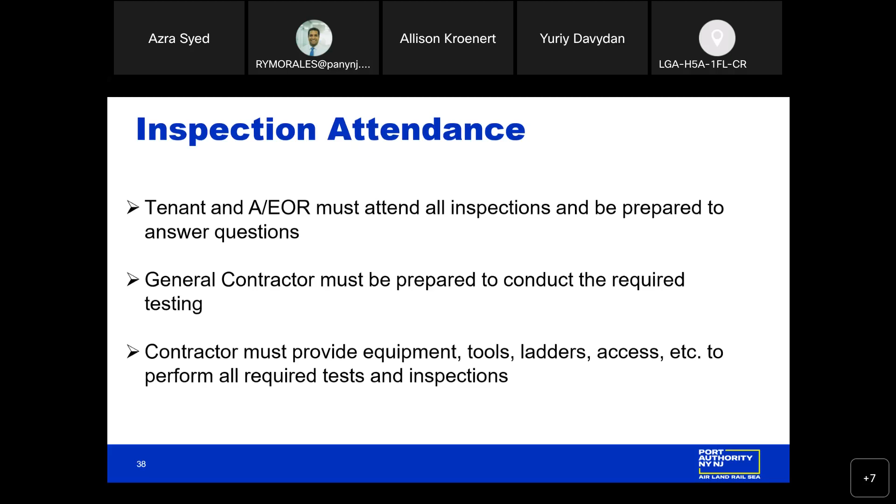Again, another checklist. We can't have enough checklists, but I'm hoping this drives the message home. A lot of this work is standardized. Having a quick checklist that I'm sure Allison would share would be so instrumental in the success of each and every inspection. So I can't emphasize enough the structural bolting.

Many times they're missing bolts, they're not adequate, they're loose, they're missing a washer. Signs, they're missing, they can't be seen, the elevations don't meet the standards. Striping, the pattern is incorrect, it doesn't match the approved drawing, so we can't even have the inspection. Electrical signs, they're not grounded, the disconnect means are not in place. Crash barriers not installed as per approved drawings. Frangible connections and other requirements that are part of the approved drawings are not in place.

Again, these are all going to result in failed inspections, or inspections that won't even make it to an official quality assurance and traffic engineering audit. Next slide, please.

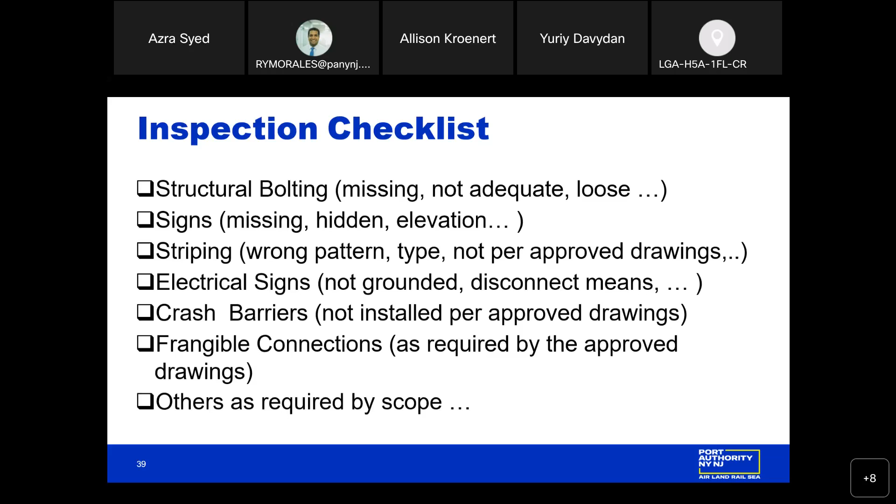After the inspection, I believe you heard this from the resident engineer and Dan from our office, that all PA inspection comments will be discussed with the team during the inspection. The REO will gather the inspection team, summarize the comments. At the conclusion, we will prepare the inspection minutes and distribute it to all the parties. Following the inspection, the REO will officially issue these inspection matrix.

The inspection matrix will be combined comments of all Port Authority departments. So whether it's REO, QAD, construction standards, health and safety, any food establishment, or vertical and horizontal transportation, it'll all be found on that matrix.

The tenant's team must respond to these inspection comments and share it with the resident engineer's office as soon as possible. We're hoping that the max it would take is two weeks to get these comments addressed, and you can indicate the status if there's something that's immediately ready for inspection, or also note that this is something that's going to take us X amount of time because it's a long lead item.

We could go ahead and continue those inspections and abate those few items as the work progresses. We'll include the others when they're ready. The engineer architect of record must verify the completion of correction for all inspection comments.

Once the contractor completes these comments in the field, they're all addressed. The architect engineer of record should be out there doing the same. Once that happens, that matrix gets updated. The resident engineer's office will go out and put a third set of eyes on that.

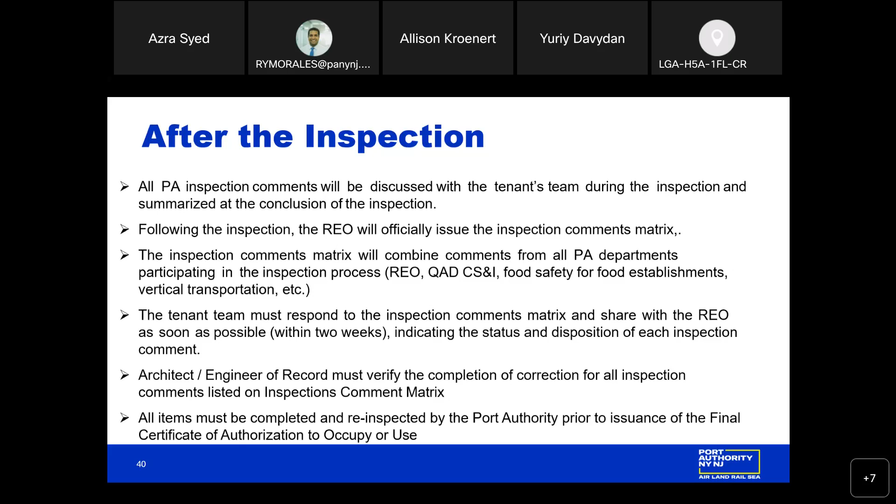Helpful hints. The engineer of record must be present on site during construction to perform all inspections and certify the completeness of work prior to scheduling any inspections. So again, we talk about it from the resident engineer side, right through the conclusion to occupancy and inspections.

Very critical: the engineer of record must review and accept all special inspection reports. The engineer of record must submit copies of the signed and sealed reports to the resident engineer's office as they are performed under cover letter indicating that the engineer of record accepts all the special inspection reports.

The resident engineer's office will attend these special inspections as they take place. Those reports get submitted as soon as possible. REO will take a look at it again, and of course there may be times that we may need to share these inspection reports with our other stakeholders just to ensure that the work is in compliance.

The engineer of record must notify the REO if there's a scope change, and I know Dan had mentioned this prior during our presentation. We will advise what the correct resubmission process would be. Fire code life safety impacts should be submitted officially through the TCAP process.

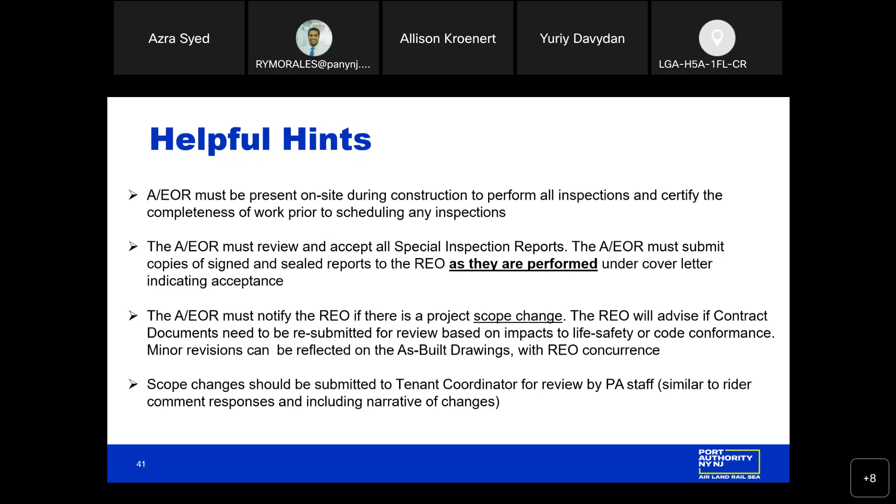Any minor work, any minor revisions could be reflected as an as-built, of course with the resident engineer's concurrence. Scope changes should be submitted to the tenant coordinator for review, as mentioned before. Next slide, please.